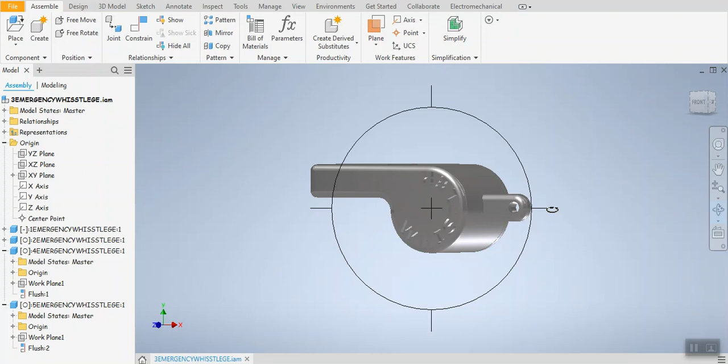The whistle is going to more or less look like that. You can modify it, make some small changes perhaps. I don't want you to invent the whistle, it's a hundreds of years old whistle, but you can design it a little bit differently. However, I strongly suggest, as in most engineering assignments, original design is essential, so we're gonna make it pretty much look like this particular whistle.

Let me explain how we're going to do this. First of all, it's made out of several parts. Part number one is the cap part. The body, this highlighted part, will fit to the cap. The cap is a projection that fits into the depression inside the body, and maybe it's going to be glued or adhesive will be used later on.

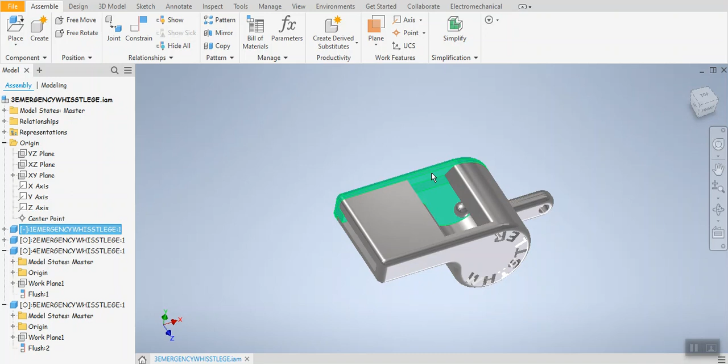This is the second part, the body part. First, we're going to create the cap. And third, we're going to create the bead inside, which is a sphere, with a diameter of

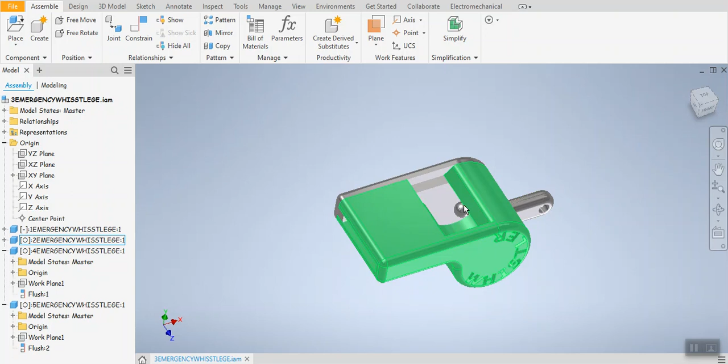perhaps 0.2 inches. And finally, the fourth part is going to be the handle part, with the hole for a cord to pass through, maybe if you want to connect, or somebody, the user, wants to connect. And ultimately, you can literally write your own name, or mom's or dad's name, or teacher's name, whoever, here.

And I call this whistler, so I wrote an extruded, it's a depression extrusion, whistler. I named the whistle as a whistler, but you can have the school name, Fairfax High School, or you can just simply use the company name, your last name, and so on.

All right, okay, so let's start. We're going to have 1, 2, 3, 4, 5 drawings. The fifth drawing is going to be the assembly drawing, and 4 drawings will be the part drawings.

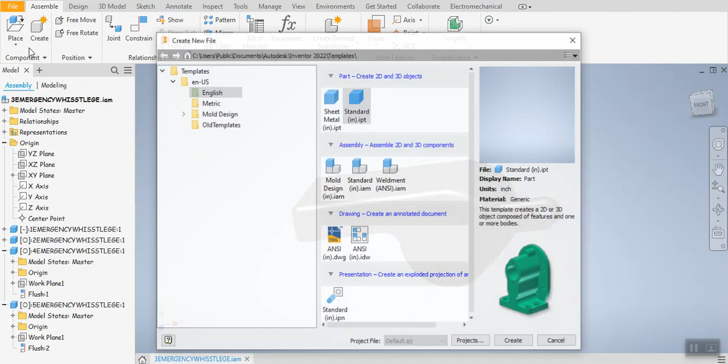Please start your Inventor and move your cursor over the file, click on the new button, select the English units and standard IPT in inches. It's always important to check the facts, so I usually go to tools just in case, to make sure that my

units are inches still, even though I chose the right one. Go to document settings, go to units, and find out it's inches and pounds and masses and so on. Angles are in degrees.

A number of other things you can check out too, material generic. For example, you can select stainless steel. It's a good start, so stainless steel is a good material, and apply it.

There are a number of other things you can do, tolerances for example. Tolerance is 1/32 of an inch. Use standard tolerancing values and apply, and okay.

What's the tolerancing? There's going to be at least one semester course in engineering school about dimensioning and tolerancing, called exactly that, dimensioning and tolerancing. You learn a lot about parts that are fitting together. It's fun, interesting, and a very useful class. I suggest you take it, and I'm going to explain a little bit about dimensioning and tolerancing as the opportunity arises, but this is not going to replace a college course. There's a lot more to learn.

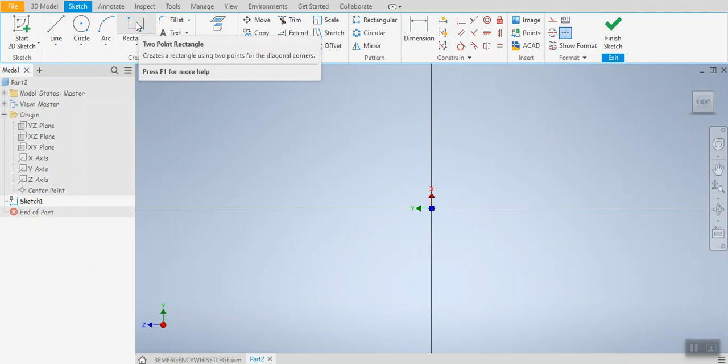So the sketch is created. Now I'm going to draw a rectangle. Now what is the rectangle for? I want you to ask those questions to me because it's so important. What is the rectangle? The rectangle is going to be a support drawing, a support line.

It provides me 4 lines to enable me to construct rest of the lines accurately. So it's called scaffolding in a construction. You need another construction for a construction to happen. It's called scaffolding. Or in a drawing, it's some kind of a construction in a manufacturing drawing such as this one. You need extra support lines, construction lines, not the real actual object lines, but the construction lines to build the object lines accurately. So that's what the rectangle is for.

So the dimension of the rectangle is going to be matching the length and width dimension of the whistle. I want this to be 1.625, but height, I want it to be 0.8, so I'm typing 0.8, pressing Tab key, that highlights the length of the rectangle, 1.625, so I'm typing 1.625. I appreciate Inventor because it highlights and demonstrates what reminds me what to do. So I enter the numbers and everything.

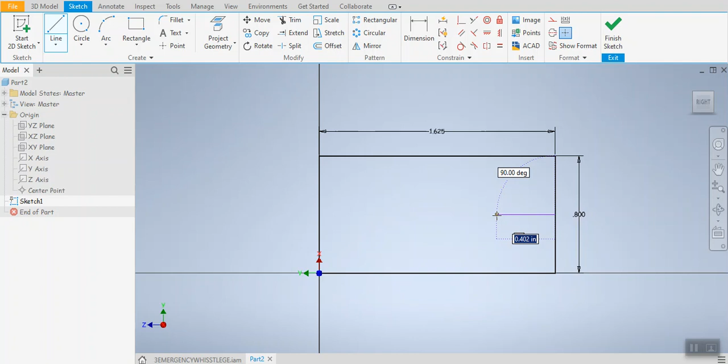And I need one more construction line because I need to draw a circle and the center of the circle has to be established. So I need to select the line command, find the center point of the right side of the rectangle, and try to hold steady the end of the line as much as possible, perfectly horizontal. The line has to be perfectly horizontal, and that's going to be half of 0.8, or 0.4. I'm typing 0.4, enter.

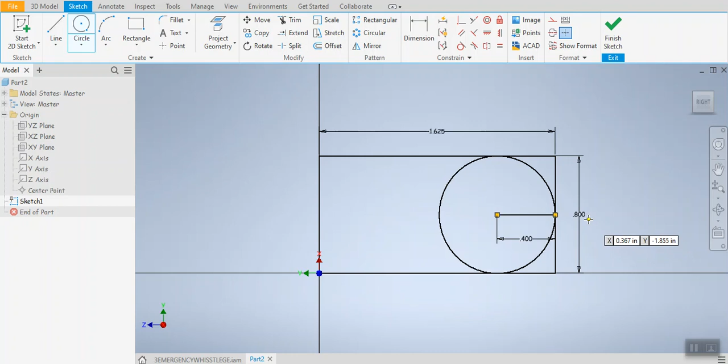Now I'm selecting lines to delete them. I don't need the left vertical line. I don't need the bottom horizontal line. I don't need the right vertical line. I don't need even the dimension. Not even the construction line I need. I'm just erasing lines. And I don't need this extension.

But first, before I erase this line, I need to erase the dimension. So I erase the dimension. And I'm going to trim the end of the line, the extension of the line.

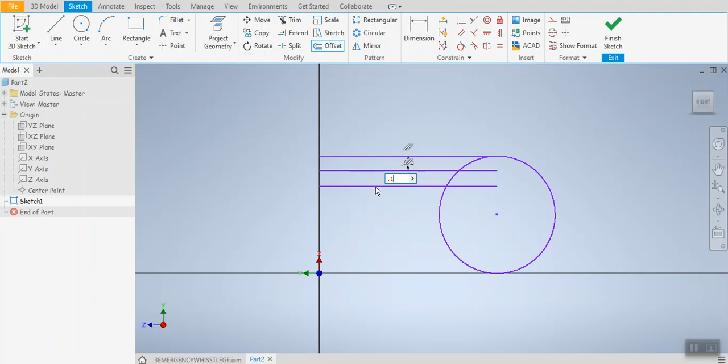And now I'm going to offset the line by 0.1 inch. So this line will be offsetted, 0.1, enter, enter. The last line will also be 0.1 inches, enter. And one more time, I'm offsetting 3 times, 0.1, enter.

So far, so good. As you realize, I'm trying to create the cap, and the cap has some protrusions and some projections as well, protrusions and depressions. So I'm trying to visualize it. I'm forcing my imagination, my mind to visualize it.

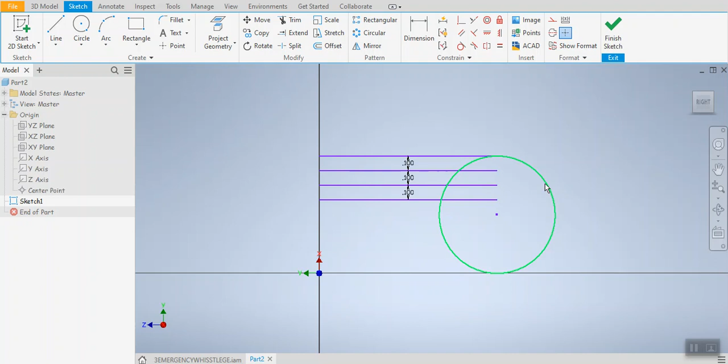So I need another offset. This time I'm offsetting the circle 0.1 inches. All right. What else do I need?

I need a cap line between the end of this here and the vertical line on the left. I'm trying again, visualizing what is happening. Certain lines has to be trimmed. I imagine this line has to be trimmed. This line has to be trimmed. The circle part of the arc has to be trimmed.

This part will be trimmed. This part will be trimmed. This part will be trimmed.

Looks like I almost have everything, except that sharp ends doesn't look good to me.

I'm coming from the engineering background. I'm coming from manufacturing background. I did work with a number of engineers, architects and manufacturers before. So I realized that sharp corners are not very good. Nobody likes it. So I'm going to use fillet and develop the habit of creating a fillet.

For example, this end and this end, maybe there should be more than 0.25 inch radius fillet.

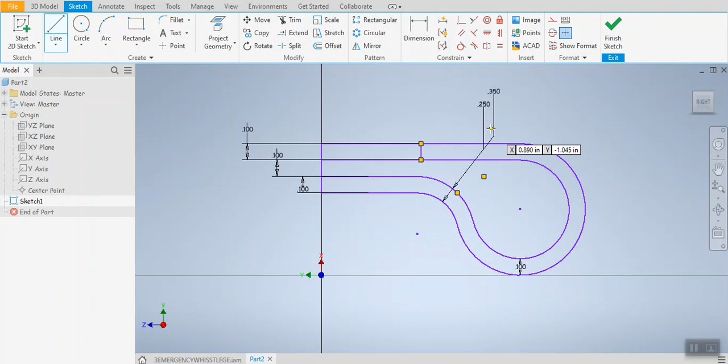Drawing freehand sketches is a very important part of the design process. What do I need to do? I need to draw a simple line here. I am creating this line, thinking way ahead of what I'm going to do. Right now it's not useful, but after half an hour, it will be useful.

This line, we're going to offset about half an inch. So I'm going to use the offset command. Select this line this way, type 0.5. And maybe you realize there is a hole at the top of the whistle.

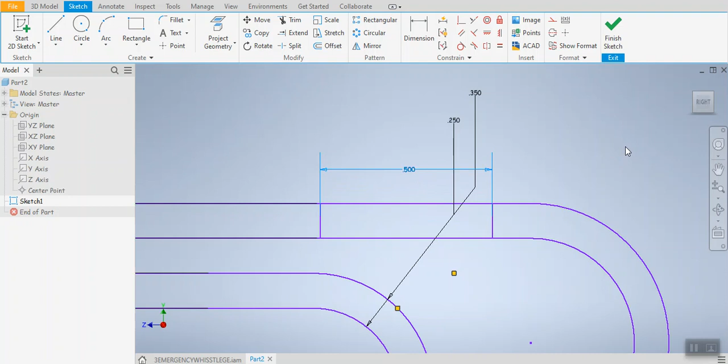And that hole should be about this. Now I'm going to rotate this line also. I'm selecting the line, and I'm also selecting the center of rotation. Now I'm going to change this angle.

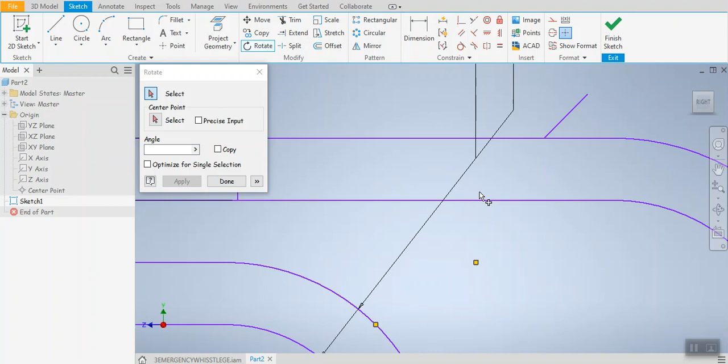135-degree angle, so 90 degrees plus part of 135 degrees. So I'm going to type 135, enter. Done. And I'm going to use the extend command to extend it, and then I'm going to use the trim command to trim that part. That's my master sketch.

I can start extruding. I'm going to finish the sketch and save my work as a whistle. Simply whistle. Make sure that I'm going to put my last name or name on it too. So as soon as I ended up finishing the sketch, I will go to File, Save As. Please go to OneDrive and call it, I'm going to call it one whistle.

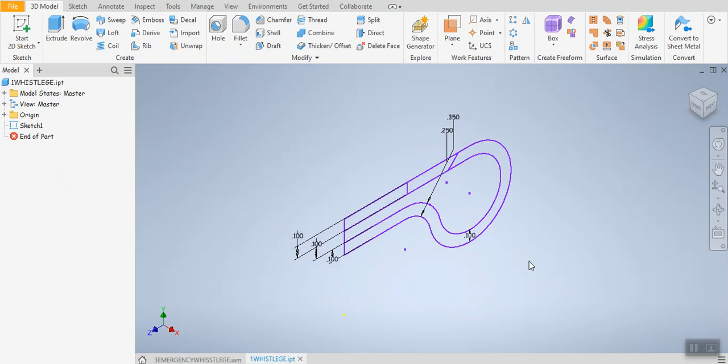Good. Now extrusion can start. Extrusion is going to be critical, because certain parts I want to extrude only so much, certain parts I want to extrude even more and at an angle. So I'm going to go with the 0.1 inch extrusion first.

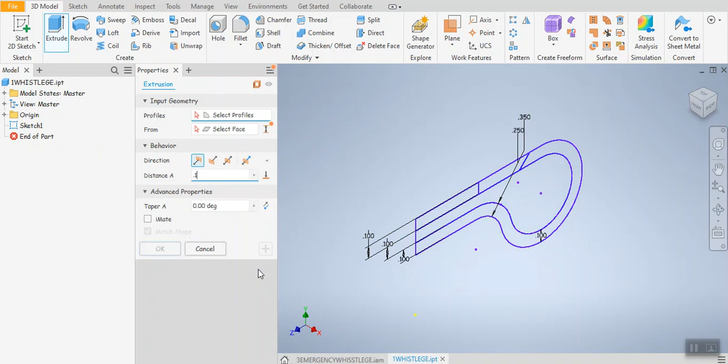And I'm going to choose this part, and this part, and also this part. Now I'm going to add a new extrusion.

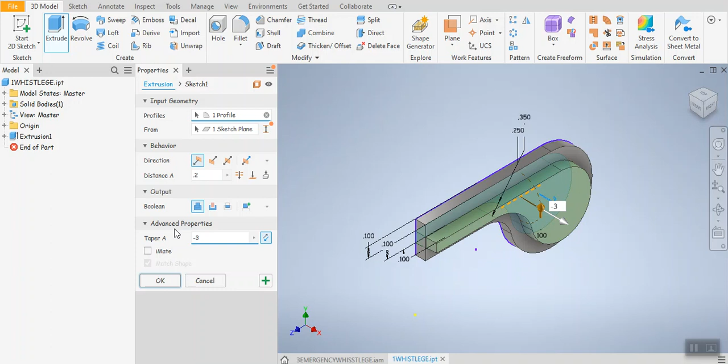This is the interior part, and it's going to be 0.2 inches of extrusion in the opposite direction, this way. Not only that, I'm also going to put an angle here, perhaps -3 degrees. Why do I need that? Because the protruding part has to be smaller than the hole, that's the reason for perfect fitting. So a -3 degree protrusion will enable me to fit this cap.

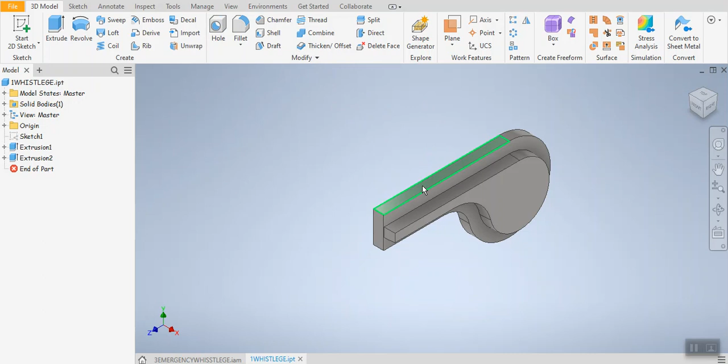Is everybody with me so far? Good. Is it finished? Not yet. Stainless steel, it's all good. A number of things I would like to do - one of them is fillet. Don't leave any sharp corners, especially if somebody's going to put it in their mouth. These are sharp corners, and it's stainless steel, so use the fillet command.

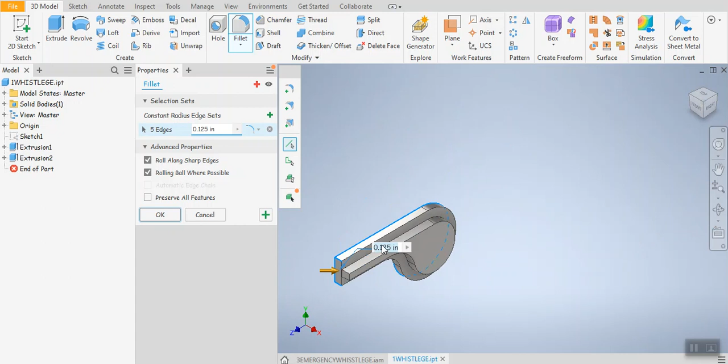I'm going to just turn around and try to make this. I'm going to reduce the 0.125 to 0.1.

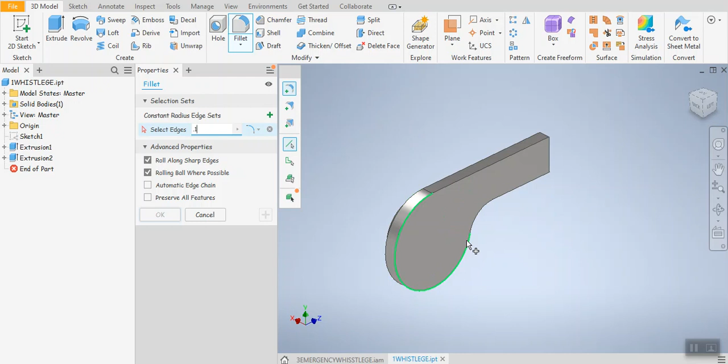I think we have accomplished what we wanted to. Or maybe we can make it a little bit less, 0.09. Okay, this is far better.

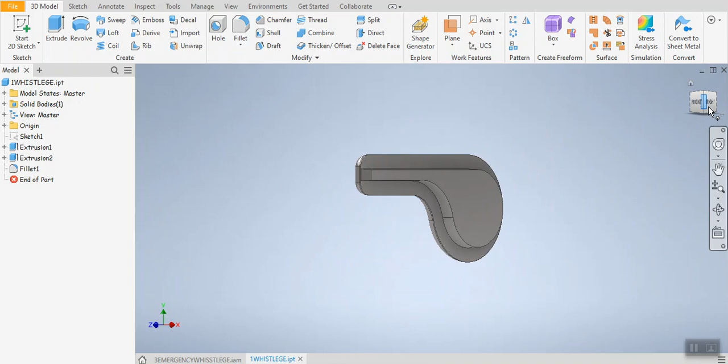Now we can save this. This particular part is going to be the cap that's going to be fitting inside.

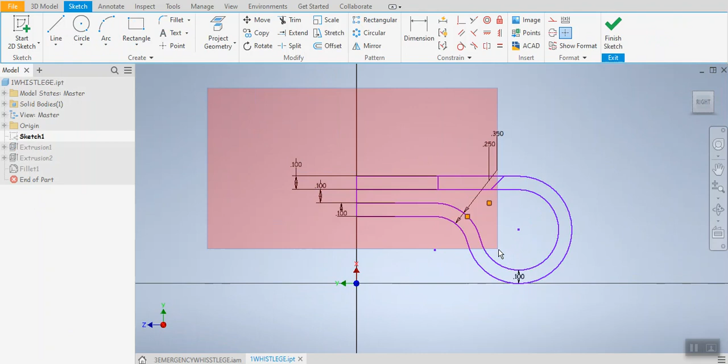So I suggest you make one thing before you start the second part. I suggest you go to the original sketch and copy the original sketch. Control C will work for me. Now, finish the sketch - it's already been saved, you don't need to save it again. Start a new drawing under File, New, another part drawing.

In the system, create, and select your YZ plane, and Control V. Okay, you need this.

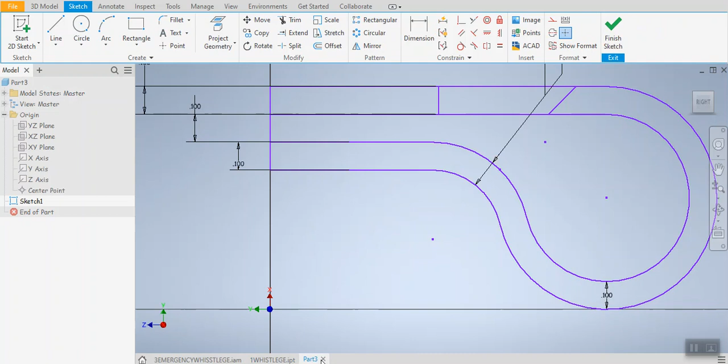Try to keep in mind that one part will fit into another. So earlier you simply finished the left side, and now on part 3, you're doing the right side. Just look at it - this is the left side, and part 3 will be the right side. You're going to use exactly the same lines.

So finish the sketch, just simply go to extrude. This time we're extruding everything one at a time - 0.1 inches extrusion.

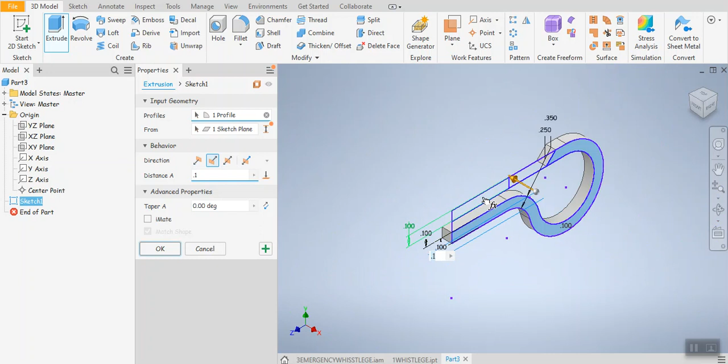To the left, remember everything will be extruded to the left. This is one extrusion, 0.1 inches. Now the next extrusion is the plus button, click on the plus button.

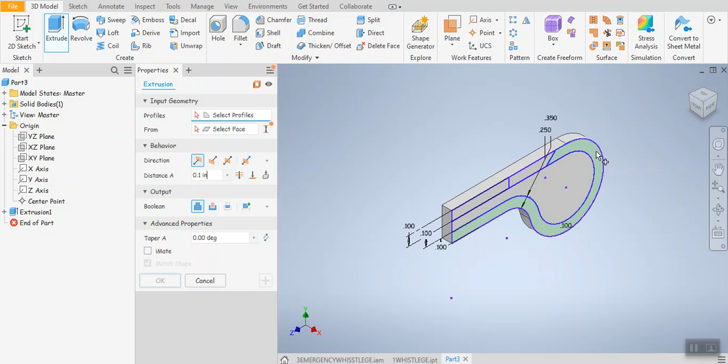Choose between first and second lines, area that is only between first and second lines. That extrusion will be in the opposite direction. Let me take a look at my dimensions, and 0.75.

0.75 and 0.65 is fine, 0.65 inch extrusion, and that's going to be plus. This is the same extrusion, pretty much.

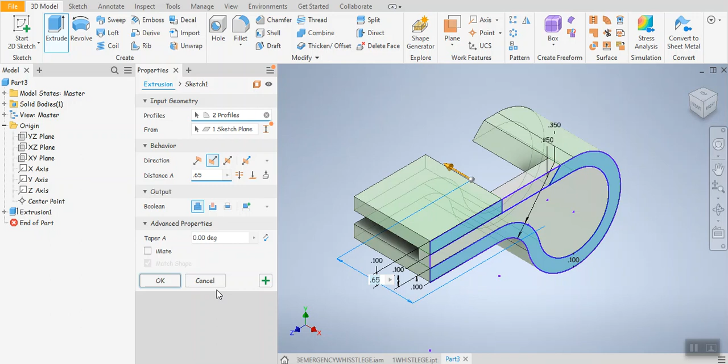Does it look right to you? About right, yeah, sure. Okay, if that is the case, finish the extrusion. So we can live with this and okay it, click the OK button.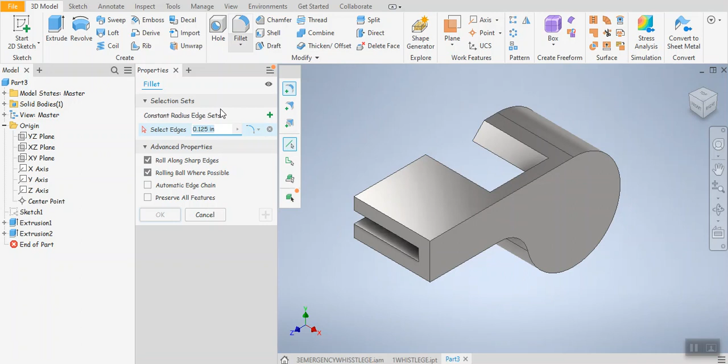Make sure that the material is stainless steel, again, because people are going to put their mouth on it, okay? So we need to get rid of the sharp corners by using the fillet command, and we're going to go 0.09 inch fillet, okay?

All right, and this is the point you could say, and okay. I think it's all finished right now, and this part will fit into the next part.

Now you save it to 'whistle'. Okay, this is the second part, so that's why you can call it 'whistle 2'. So you go to File, Save As, and make sure you put your last name or first name in the OneDrive.

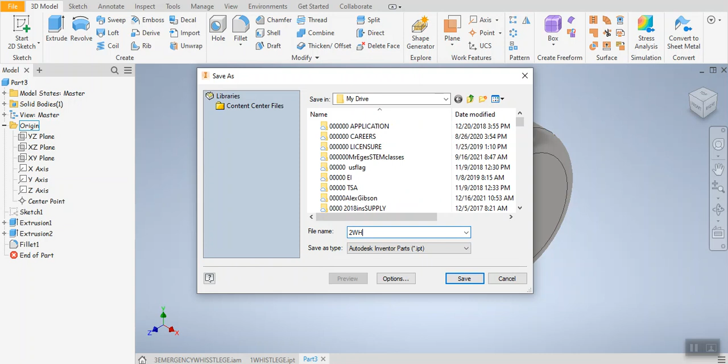What else is there? One of the interesting things you can do, you can choose the surface, okay, and start, and then you can type anything you like. Fairfax High School, put your name, your last name, Ege Industries, for example.

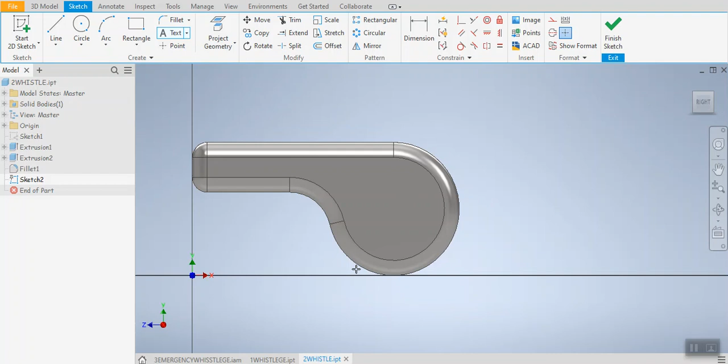How do you do that? You go to text, okay, because it's a round surface, maybe you should draw an arc first, I'm suggesting drawing an arc like that, so that the text will be round, and there's a round text, geometry text, by the way.

Okay, when you click on the arc, it's going to give you a chance. Now remember that this distance dimension is very important. 0.02 inch offset is not dark. Maybe we should choose a heavier font, maybe Arial or Arial Black, Arial Rounded MT Bold, okay.

And size 0.125, or 1.2, or one, just 0.1, and capital letters, okay.

And just simply type something that designates that it belongs to you, designers, for example. Maybe it's too small, I'm not sure, we can check it out. Designer industries, so this is too long, make it short.

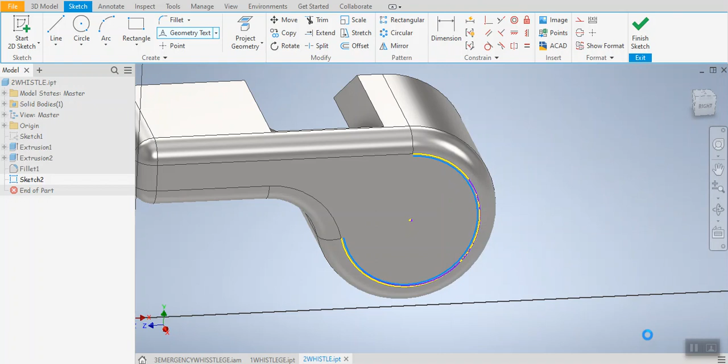Okay, so it didn't turn out the way I expected. Double click on it, so see if you can make a modification. It should be inside this area, first of all. So does it work? There are a number of positions here, okay? And change the direction first.

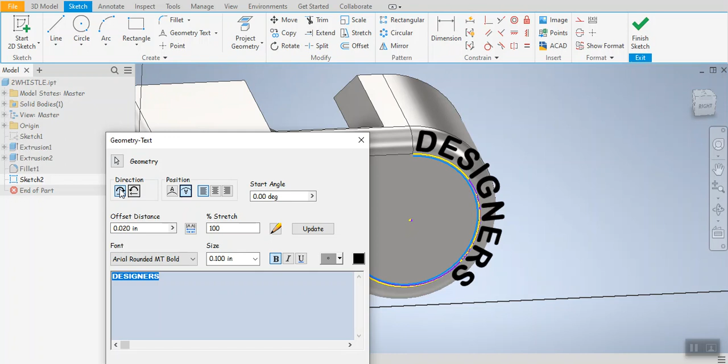See if it's gonna go, and update. Nope, didn't work. Update again, this time it worked. I selected the second one, direction number 2.

But letters are too much into each other, so you need to separate the letters. How do you do that? You need to put this in the center. How do you separate the letters?

I want to fit the text in larger. I think this is better, okay, I think this is better. All right, so you wanna try update and everything, and okay.

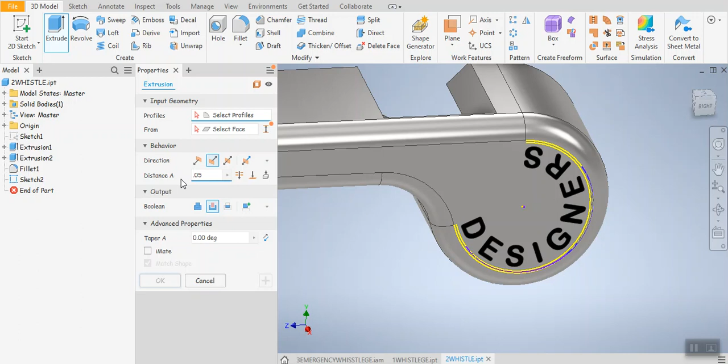Now, what does it do? Unless you finish the sketch, and then you need to extrude it, and you choose selection, cut extrusion. Make sure that it's 0.05 or something like that. You choose inside the area, okay, so this is cut extrusion.

All right, okay, there it is. Now the word 'designers' is written on it, or your last name, family name, industries, and so on. So you can save this as 'whistle'. Good, what else do we need?

Well, we're going to go to assembly drawing, we're going to use assembly drawing. We need two more parts. Why do you do assembly? I can create two more parts inside the assembly drawing, that's not a problem, okay? So assembly drawings also enable me to create new part drawings.

So these are small parts, unimportant, important parts, but small parts, so it can be created from inside the assembly. Okay, so far so good.

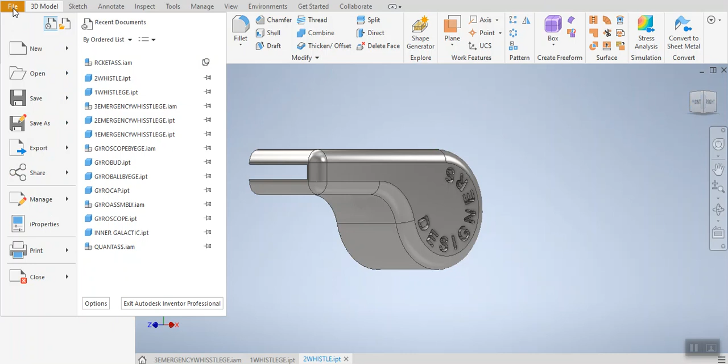I'm saving this one, I'm going to go to File again, create new. This time I'm choosing standard inch .iam, Inventor assembly, so I'm choosing this drawing and create. As usual, when you create a new assembly drawing, the first thing you do is to place the parts.

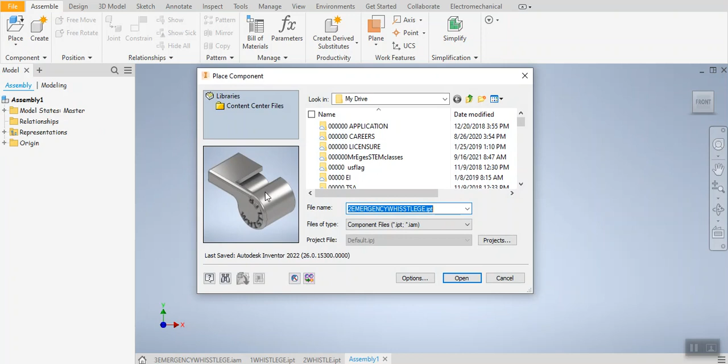So I need this part, and click here, good, escape. I need the cap too, one whistle, place again. Two emergency whistle, nope, I need to call this one whistle.

Open. Click here. I'm going to bring the first part again. Okay, place. Whistle. I just want to make sure that I have the right part open. Okay, all right.

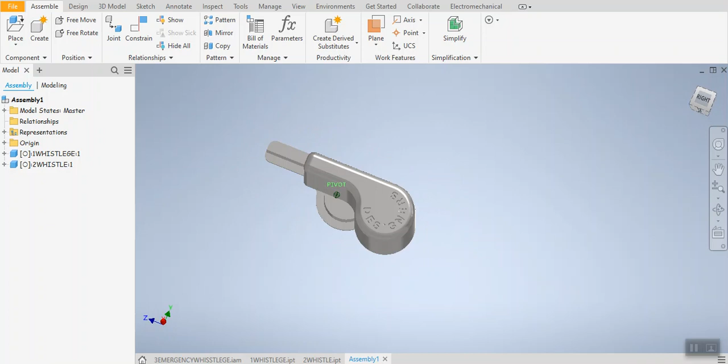So is everybody clear on this? So how do we put together? Think about it for a second. How do we put this together? By carrying by hand? Yes, sure, but this is not the way to do it. Okay.

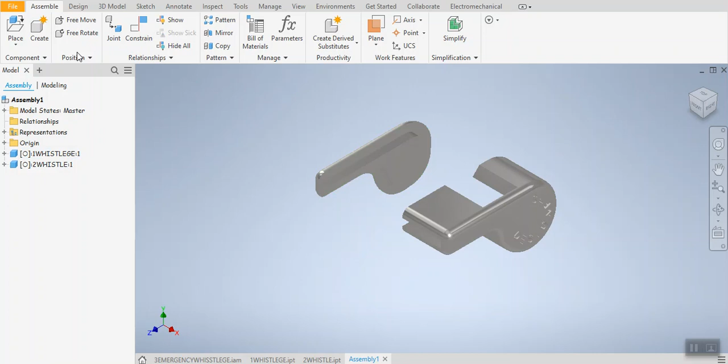If you want to assemble it within an assembly drawing like this, perhaps the best way to do this is to use the joint command. Not constrain, but joint. Constrain is only used for the parts that are supposed to be manufactured according to exact geometric dimensions. The joint command gives you a chance to fit the parts using special geometric features. So what kind of feature are we looking here?

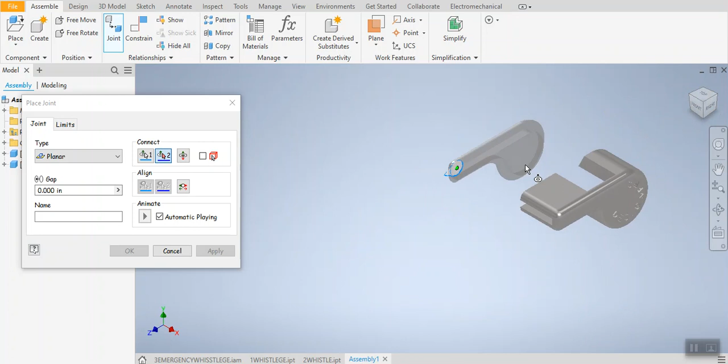I'm looking for a planar feature, and I need to zoom in on the surface. Okay, right here, click on this. And then I'm going to just change the angle. And then I need to choose the center of the arc here.

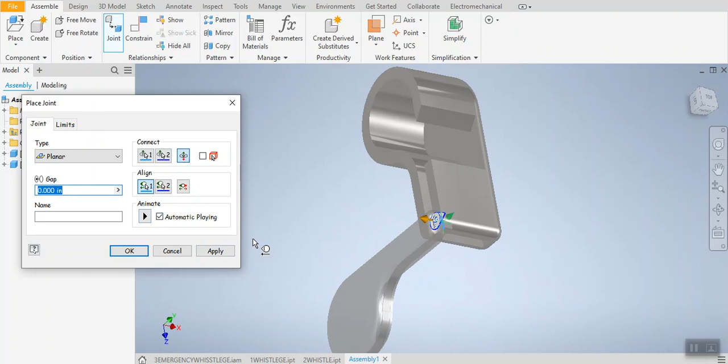And it did not work for me. I may have to try this. So I'm going to cancel this one and try to do it again. Okay, joint, and the planar surface.

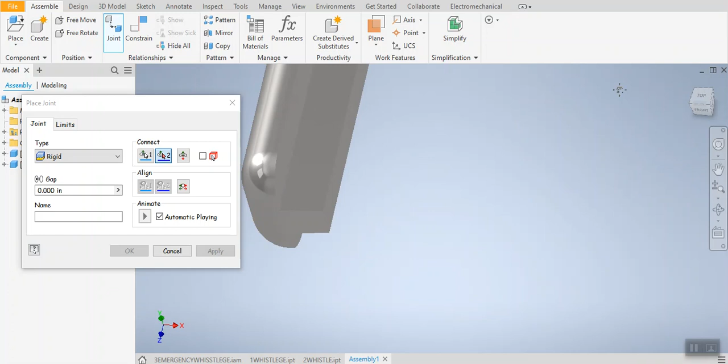It's a rigid joint, let's see. I choose... okay, tip is very important. And now I'm going to choose the opposing part.

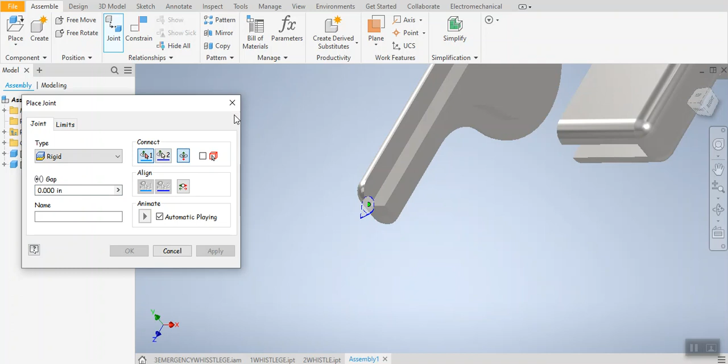All right. Well, if it's taking me a few times, it will certainly take you a few times as well, so just be patient. I'm not only selecting the surface, I am also selecting a point on the surface as well.

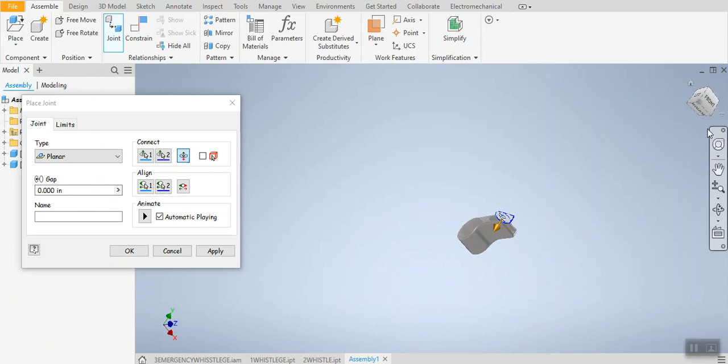Hey, this time it worked. I have chosen the planar surface and the part perfectly worked. And apply. The planar surface, rigid planar surface, yes.

Okay, the whistle is not done, and if you try to sound it, it's not going to sound because there is no bead inside. So for that to happen, we need to create a sphere. Okay, so I'm going to just simply...

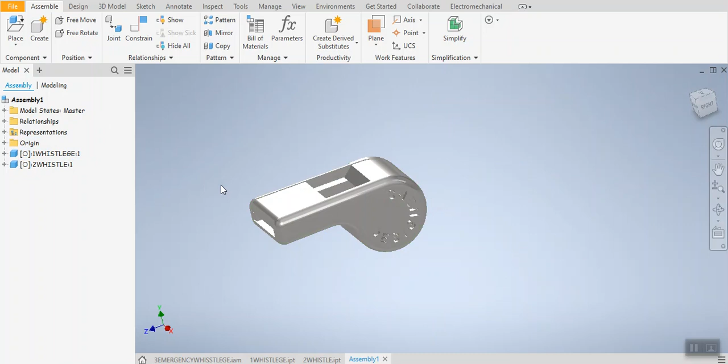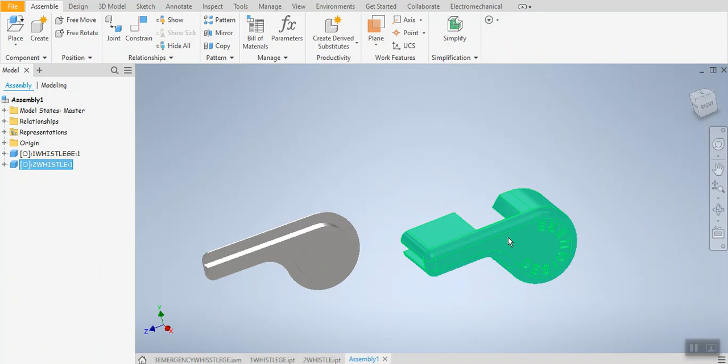Remove, okay, everything pretty much the way it's supposed to be here. All right, and I want to position them the way they are going to be 3D printed. Okay, possible, that's what I'm going to do. And one of the things I like to do...

The part that the handle, that will work for us. Okay, so one joint worked. Now I want to do the second joint, all right? And this is going to be the planar joint, perhaps. I wonder if I can find the plane.

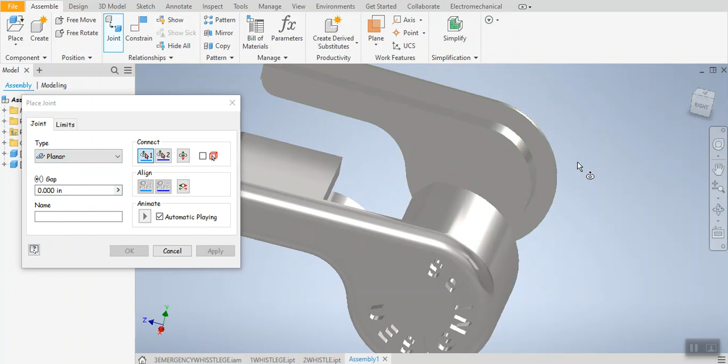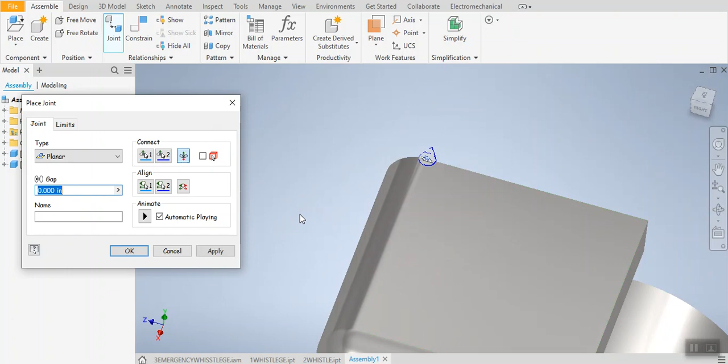Okay. The planar joint helps me to set it up correctly. The second planar joint, so I use two joints, okay. All right.

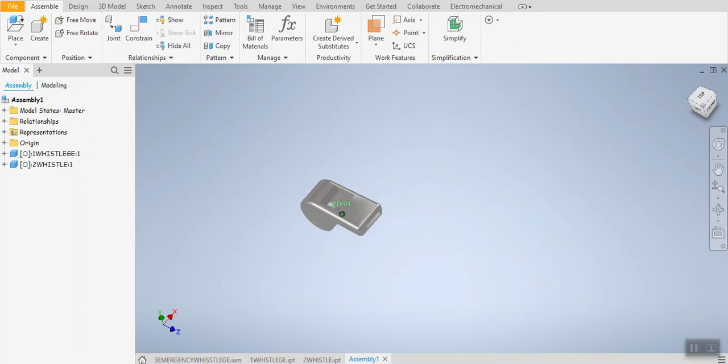Okay, one more time, this time it worked. Rigid joint, and I select the protrusion. Okay, and now...

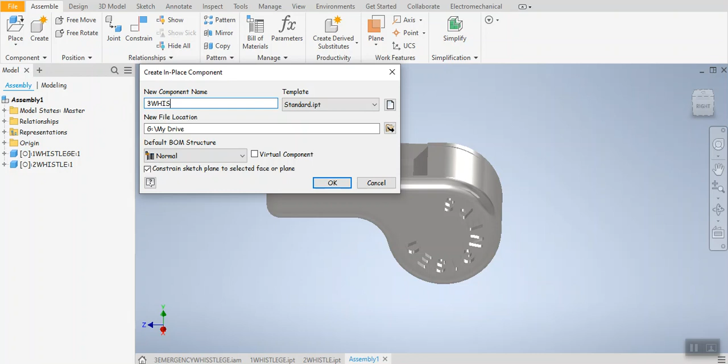There is a part that we're going to have, a handle. Okay, to have the handle, we need to create a new part. So there's a create button on the top left-hand corner. Okay, and let's call this 3 whistle.

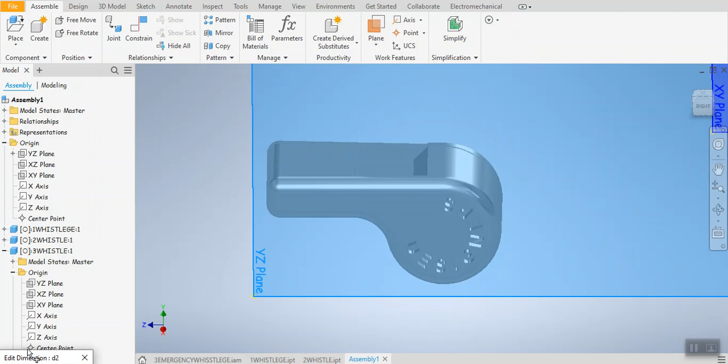And now we need to choose a particular surface, a plane. We choose the plane command. Okay, and I just want to make sure that the plane that we have chosen passes right at the center. Nope, it doesn't. So we're going to have to choose the plane and offset the plane, offset from this plane.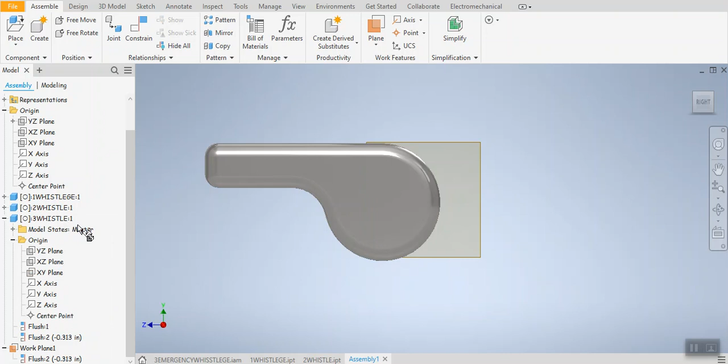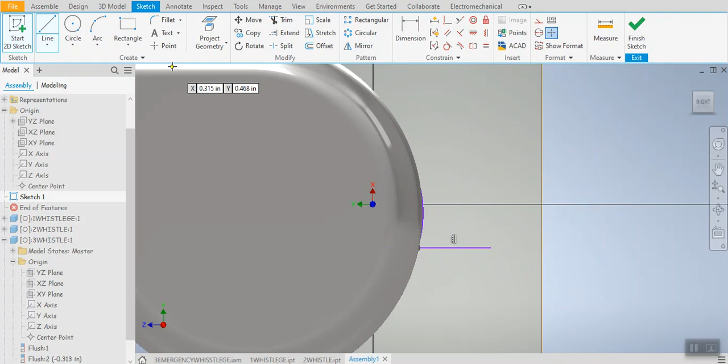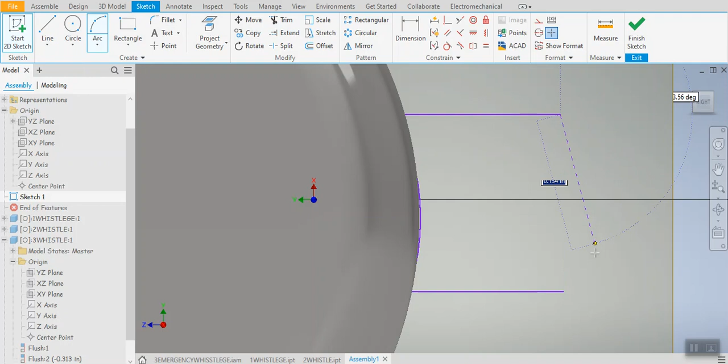All right, so I'm going to start with a line command. And draw a single line, and then perhaps we're going to copy the same line. Okay. Now we need to select another arc. And...

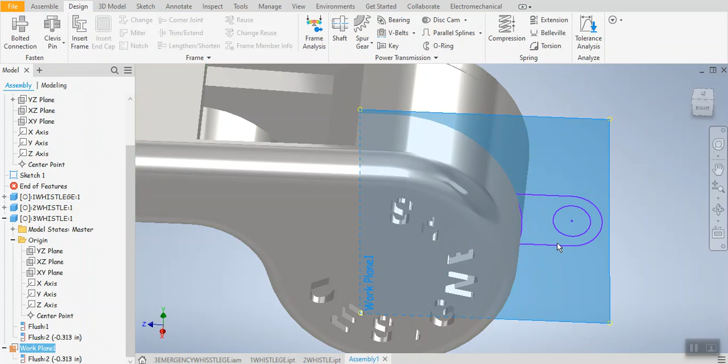Okay, I think we can extrude this part now. Two-way extrusion. And choose extrusion, it's going to be 0.125. Okay.

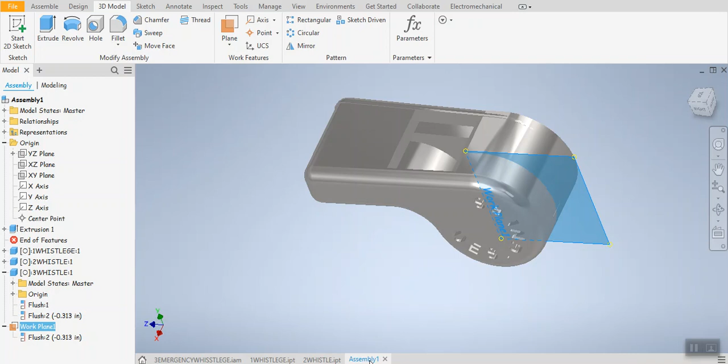All right, and I'm going to continue in the next class, in the next session. And this video, I'm going to end this video here at this point. And I realize that it's a little bit too long for one class only.